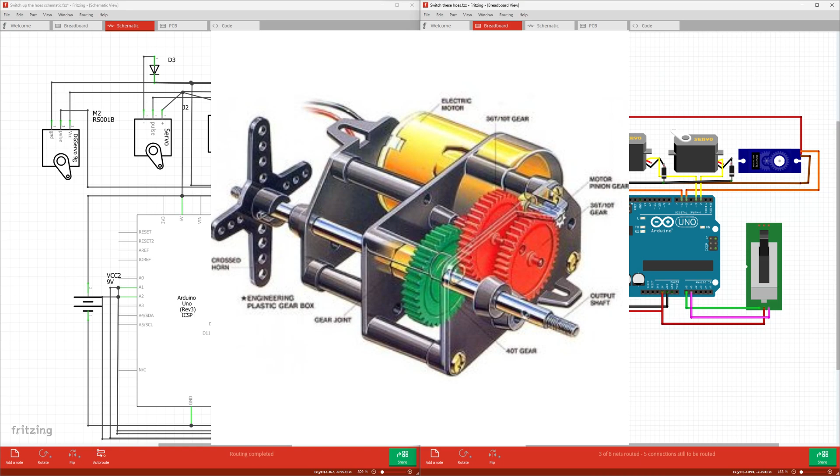A servo motor is a rotary actuator or linear actuator that allows for precise control of angular or linear position. Basically, a servo is a motor that is exact, and we can tell it to go to an angle and it will go. There is a large variety of servos. These servos can only rotate 180 degrees. I was going to go all 9-gram servos, but these servos cannot provide enough torque to push and pull the switch. So for Mark II, I had to change up the 2 middle servos to higher torque servos.

Each of the higher torque servos have what's called a flyback diode on their ground lead. When a motor turns off, the electromagnetic field collapses and causes a current spike. To prevent a spike from damaging my components, I use what's called a flyback diode. Servos have the spike too. When the spike hits, the board turns off and resets.

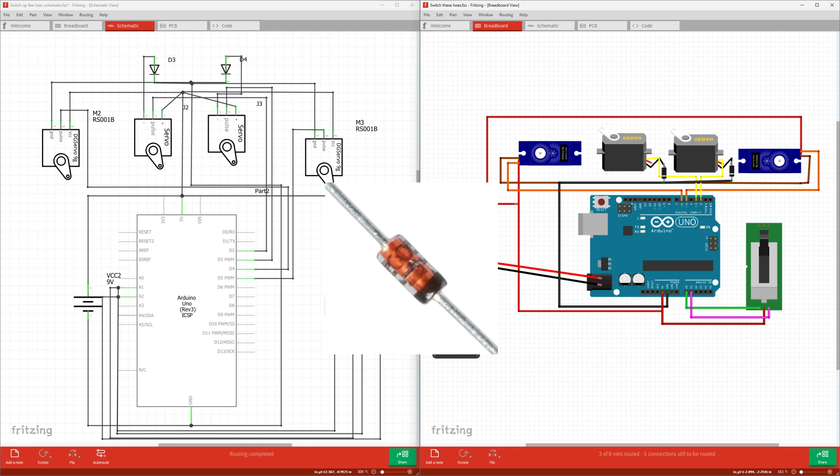Why? Don't know. Aliens perhaps. Not my issue.

Anyways, I use a diode. A diode is a one-way valve. A flyback diode is any diode connected across an inductor used to eliminate flyback. So, it fixed the issue.

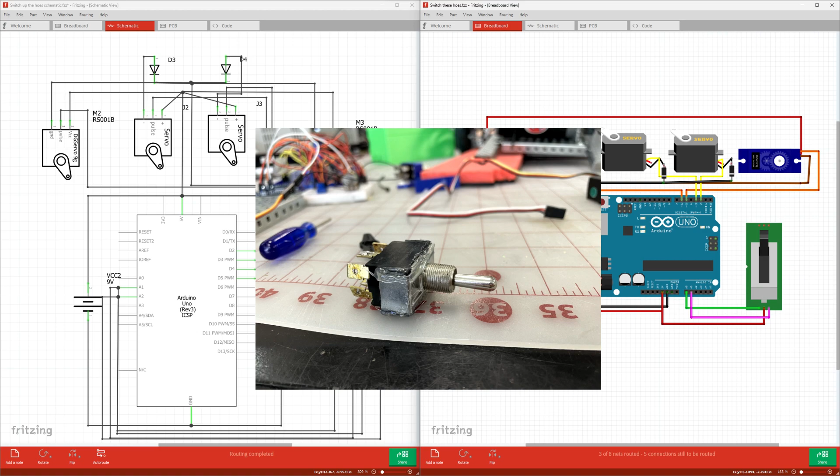The second component area of interest is the switch. The switch is a double pole, double throw switch. This switch was modified by me in 2 ways. 1, I took it apart and made the amount of force required to push it back and forth less. And second, I soldered it in a way so it's functionally a single pole, single throw switch.

This is my code. Pre-setup. This is the pre-setup right here. In the pre-setup, I set all the pins for my components, create variables, include all the necessary libraries for the servos to work, and create several objects for the servos. So this is where I create the objects for the servo library, and then all my variables needed for the code.

My setup is fairly straightforward. I begin the serial, and then I attach the servos to respective pins, and then I make sure all the doors and arms are closed on the useless box. This is so that the useless box starts in a closed position.

The main function of the code is in this while loop right here. This while loop is dependent on 2 if statements: if switch state is 1 or if switch state is 3. The switch state functions operate off of the switch state. The switch state is the direction that the switch is currently flipped to, and each of these if statements are if it's to the left or to the right.

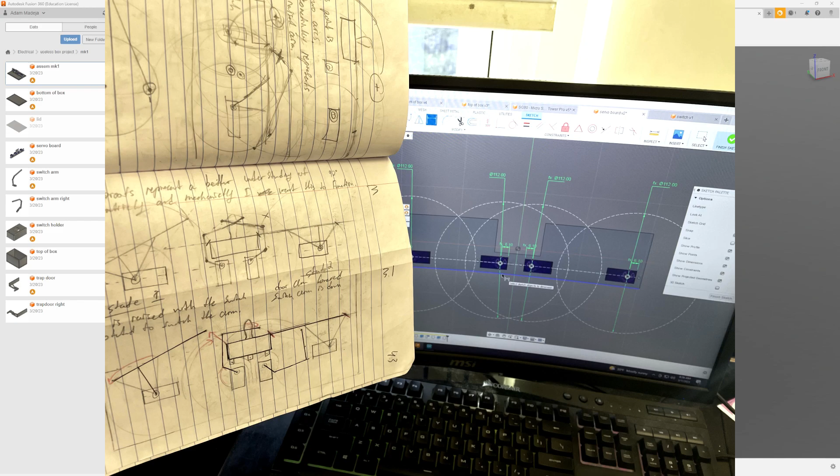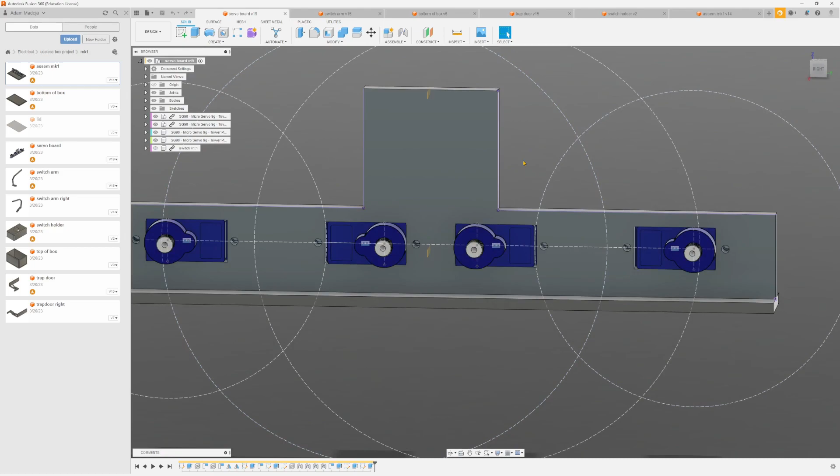First thing I did was create a base from which the servos will attach to. So I call it servo board. I positioned the servos, created holes for them to sit in, screw holes for them to screw into, and sketched their movements out onto the board.

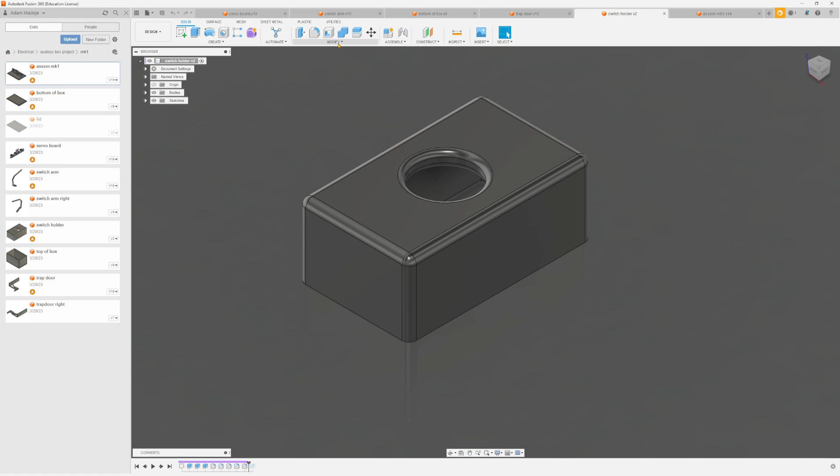Then I created a basic platform for this to sit on and potentially attach other things to further down the road. Then I created the arms, trapdoors, and a switch holder. These are all Mark 1 of this project. This is the final assembly of Mark 1, and I did 3D print all of the stuff, and this was created.

So I recorded this section. The audio didn't record along with it. Don't know why. Don't really care. Whatever. I'm going to re-record it.

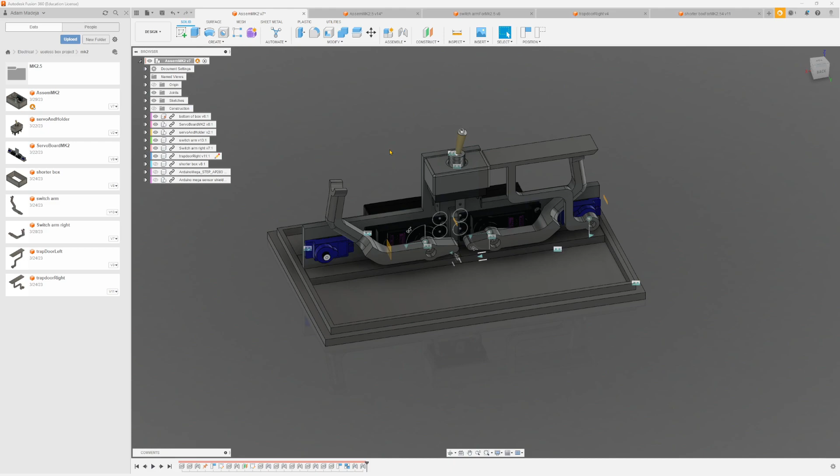So here it is. After Mark 1, there were a few things that were immediately apparent, like tolerances and parts rubbing up against each other. The main issue, however, was the 9-gram servos in the middle could not flip the switch. So this is where Mark 2 comes into play. Mark 2 looks pretty different. So we have the larger servos on the servo holder. These are high torque servos, and they have plenty of power to move the switch around. They still need the flyback diode.

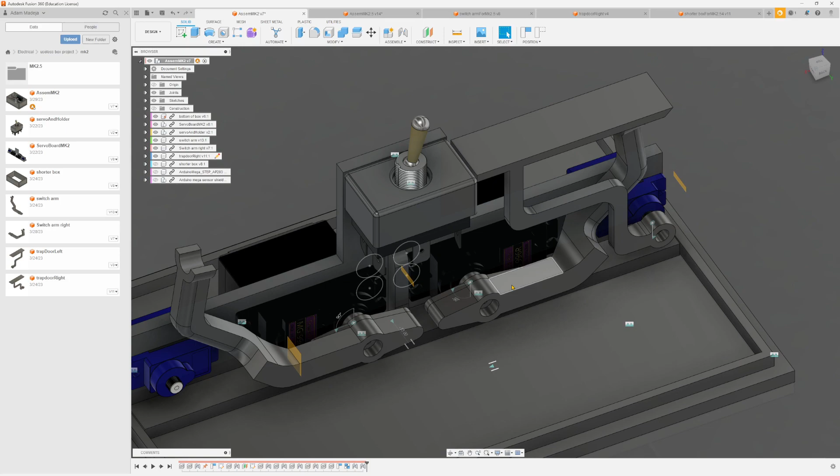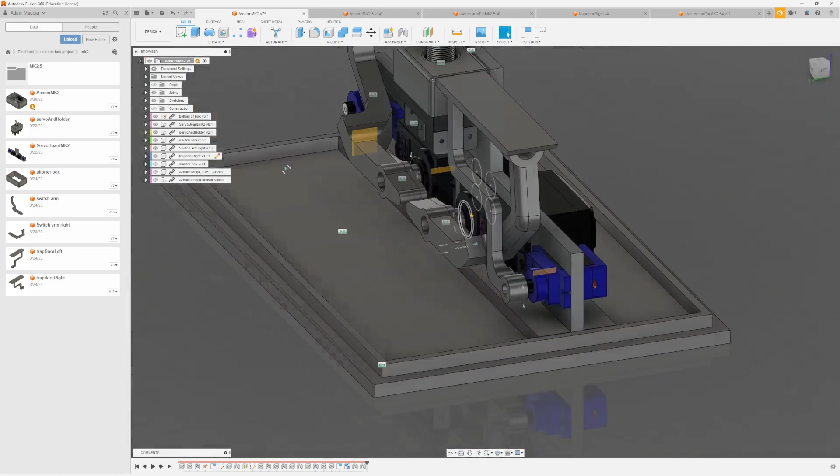Then the arms got redesigned. They're thicker, they're stronger, and they now have this little thing that lines up with the servo and kind of holds it a little better. And the trapdoors got redesigned, so they're fully out of the way of the arms. Now, this is great and all. I printed it. Nothing was a matter.

But then I designed this shorter box around it. And this was kind of like the end game of the design. And I noticed that this clips this, and there was no way I could get it to rotate within the box and down under. It just wasn't going to work. So I was thinking about complicated rotational to linear designs that I could have implemented. And then I had a great idea.

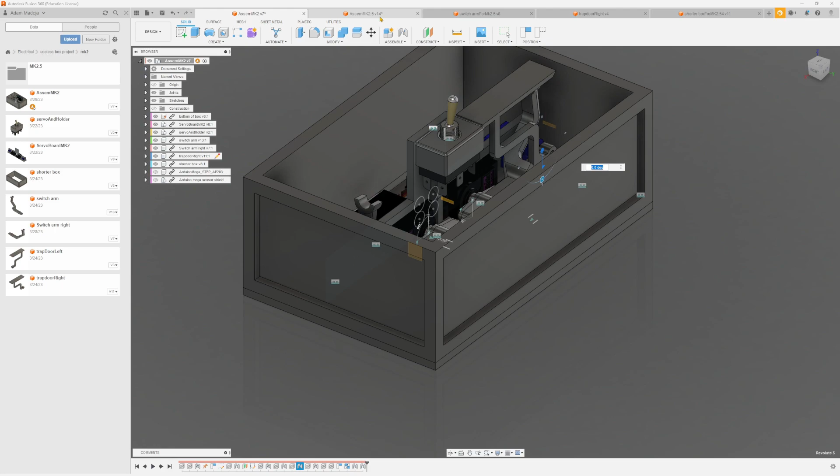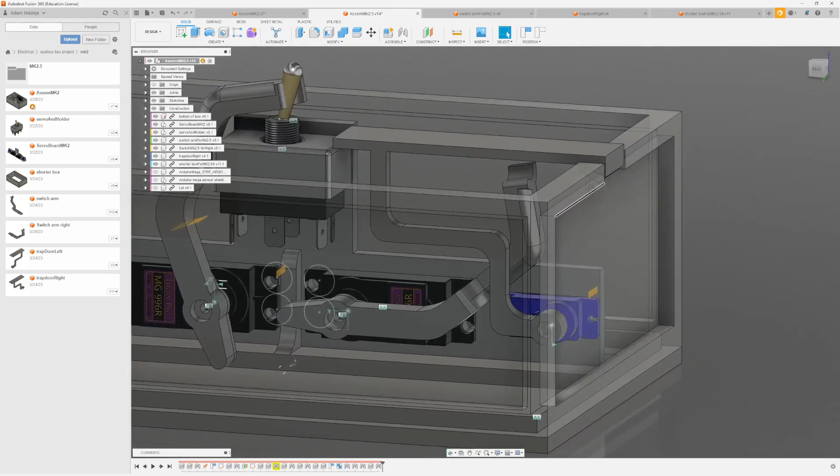And that's where we get to Mark 2.5. Mark 2.5 is much better. So I turned the box to glass just so you can see all the parts better and you can still see the components. However, I am going to hide this. So in this, the walls of the shorter box have a cutout for the trap door to sit on. See how it just sits there? And when I rotate this, it just never touches.

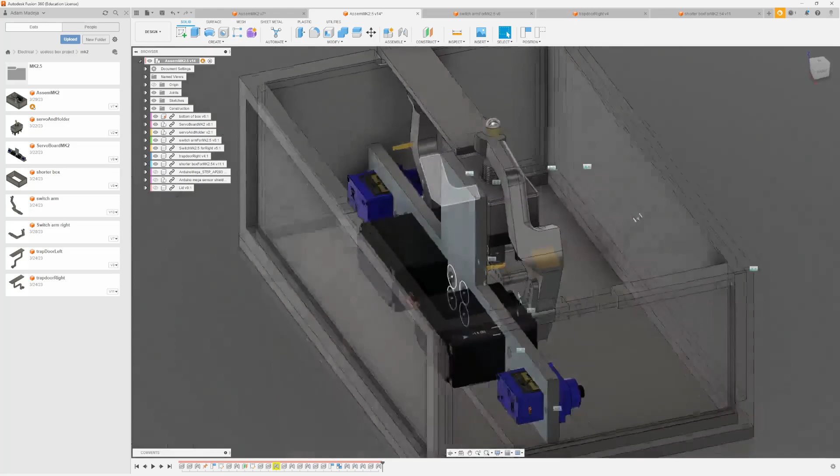And that took a while to get right. But once I got it right, it works beautifully. These also got a little bit of redesign. They didn't get shifted or anything, but just to make sure that this really wouldn't hit, I took away one of the little holders. That's why they look the way they do. And the shorter box, of course, got the little cutouts. And that is Mark 2.5.

So, time to discuss the electrical decisions I made. I first tried everything with just the board, the way it's viewed in the schematic, because shields don't really exist in Fritzing that well, or the right shield doesn't exist in Fritzing. So I did it like this. Everything worked fine.

Then I spent a day soldering the shield, and then I messed some things up, and I spent another half a day desoldering and resoldering. Because it was one of my first times soldering, there were bound to be things messed up. And I learned a bunch of things along the way. And then I got home, and things just didn't work. So I debugged, desoldered, and resoldered the whole board twice.

Things started to work. I figured some things out, like the servos really need to run at the maximum voltage you can get out of the Arduino, especially these bigger servos. They need more voltage than the Arduino can really supply, but you can get away with it. But yeah, that was basically it. It took a while for me to do this.

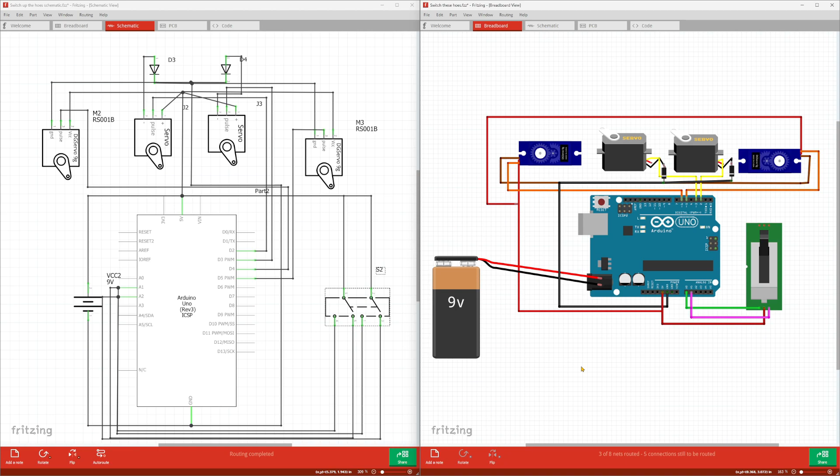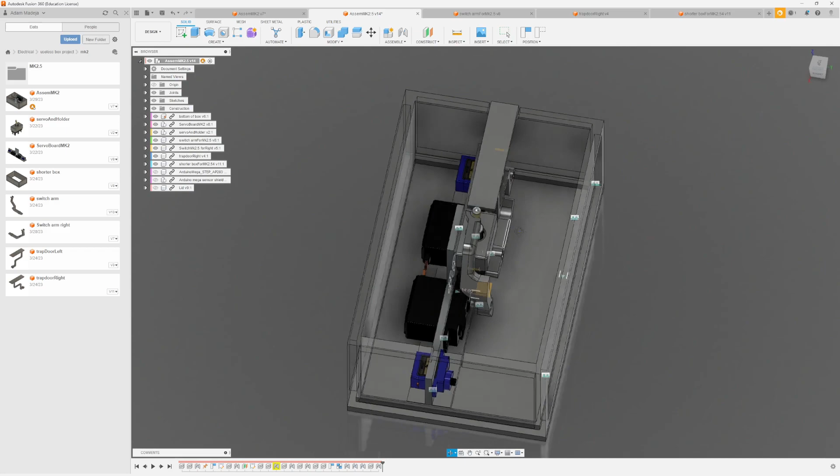I would also love to improve the wiring and Arduino placement. If we pull up my Fusion, where do you see the most room here for a board? That's right, it's over here and along this wall. Guess where my Arduino is? It is shoved in the corner. I'm not showing you a picture, but it is a tight fit. I should have wired everything better, but you live, you learn, whatever.

And I would also like to add some sound, and maybe the box can talk to you and tell you that you're a failure, stuff like that. So that's my project.